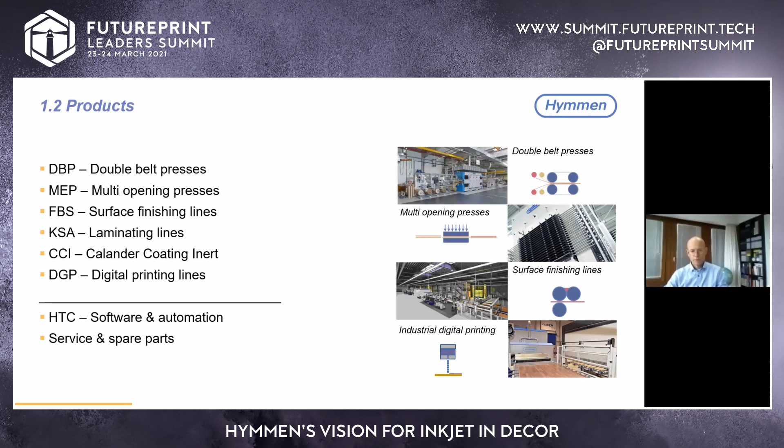Coming now to our digital printing technology, which is our focus for today. I'd like to tell you about the experience Hymmen has gained over the last 12 years. We started in 2008, presented our first machine in 2009 at Ligna, and today we estimate the yearly production on Hymmen-delivered machines at close to 100 million square meters—approximately 90 million square meters of annual digital production on our machines.

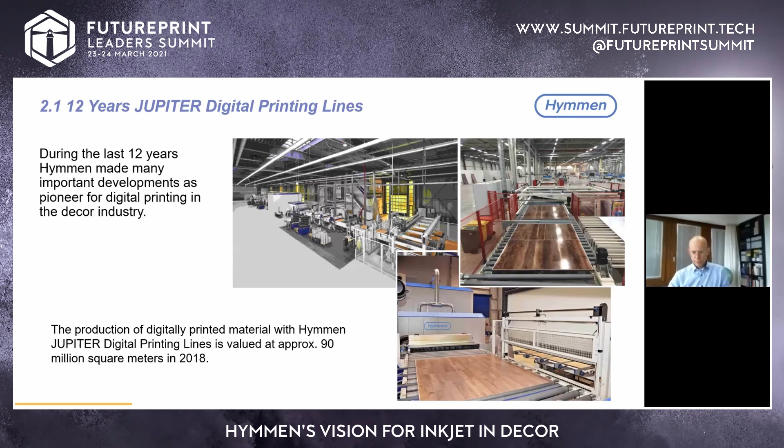You can see some pictures here of flooring lines installed at our customers. I'd like to explain a bit about the history of how we got where we are today in digital printing development. As stated, 2009 was the first presentation at the Ligna show of our Jupiter digital printing line. Our Jupiter lines use UV technology, UV-based inks, and we started with a small line on board material, then developed a line for printing roll to roll on paper.

The next step was a wider line, 1.40 meters, on doors, also UV coating, also the Jupiter version. From there we grew in width, and today the largest line, which we already developed in 2011, is a single-pass line up to 2.20 meters production width, also for boards for flooring.

We continued our development in roll to roll, also going up to a size of 1.40 meters on paper. We continued the development for edge banding material with different plastic materials—ABS, PVC, also PP for furniture boards. So basically the edge of the board can be printed digitally with the same decor as the main surface.

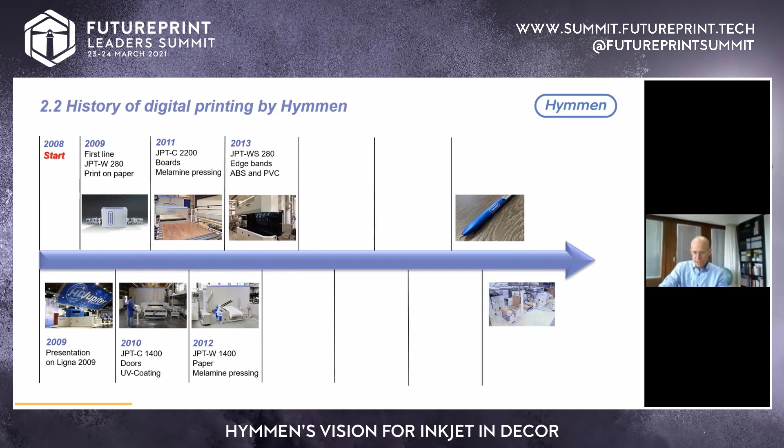Then we had a first line for modular flooring, being a plastic type flooring board, in 2014. We started with double print bars, 8 color, in 2015. We had a wider line, edge banding, double printing width, in 2016.

From there on, we continued to develop other technologies that fit together with the decor, such as our digital lacquer embossing. As the name explains, embossing a surface means making the texture, the structure that you could feel.

And we added an automatic color calibration in 2018, which is especially interesting for single pass production of very uniform colors. So if you have more stone-like tiles, this gives you especially high quality of the image adapted to the printer.

From there on, the next step that we showed and opened for the public in our demo center in Rödinghausen is 2021: the Saturn line, the first line for water-based inks, especially usable for decor paper that is processed after printing with melamine resins and pressed in presses such as double belt presses or short cycle presses, for flooring and furniture.

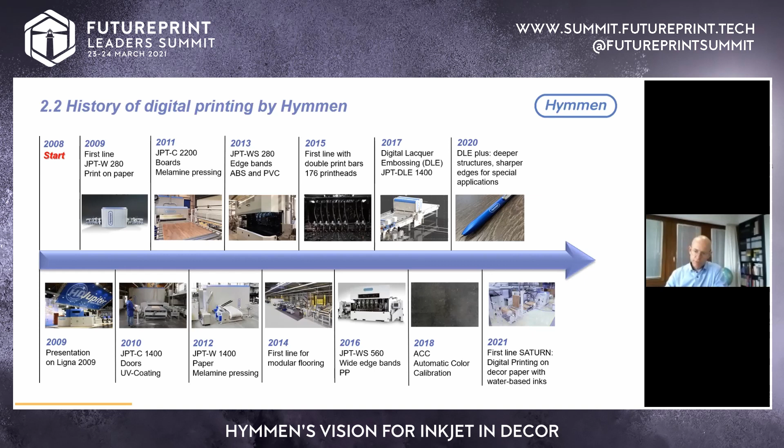So this is basically a summary of what Hymmen has done in the last 12 years in digital printing. And I would like to explain a little bit more in detail two of these developments, one being the digital lacquer embossing.

We have shortly, a few months ago, shown the second step in this development, which we call DLE+, and then go on to the Saturn.

As you see here on this slide, our inkjet technology for this digital lacquer embossing consists of a board, which is coming here from the left side, which is then applied a liquid coating, and then the inkjet embosses this still liquid lacquer with its drops, and thereafter it is hardened by UV.

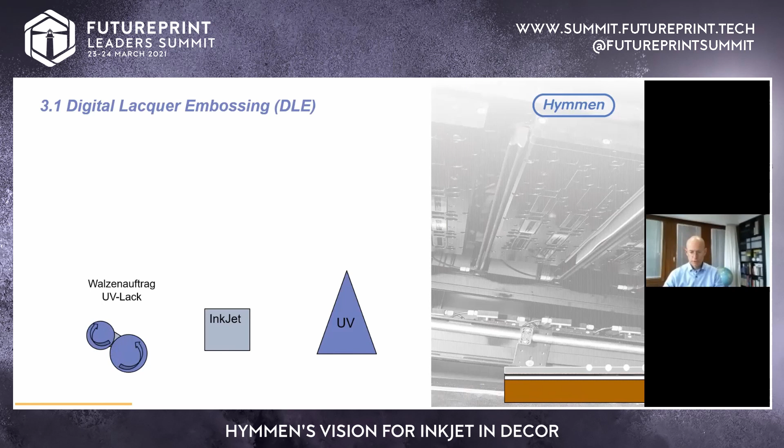I will show this animation so you can better understand what I'm talking about here. So you can see, we apply a lacquer, we emboss it with digital drops, and we harden it by the UV light. Basically, these drops that went into the still liquid layer show you the embossing image that fits to the decor that you have printed before.

The advantages of this technology are obviously the very high flexibility. Before we developed this, we had a lot of customers who talked about positive results from decor printing, but no structure that fits to that decor.

Therefore the flexibility that you want to have from digital was not fully available. You needed to—if you go into a short cycle press, for example, you have designed the decor on the board, but then you need the fitting press plate which has the right structure, or you need to change the structure if you change the decor. So it was obviously very important to be able to have a digital structure on a digital decor.

You don't need rollers or press plates. You don't have these extra costs. You have no setup time due to press plates or roller changes. As I said before, you have the same flexibility in the decor and in the structure.

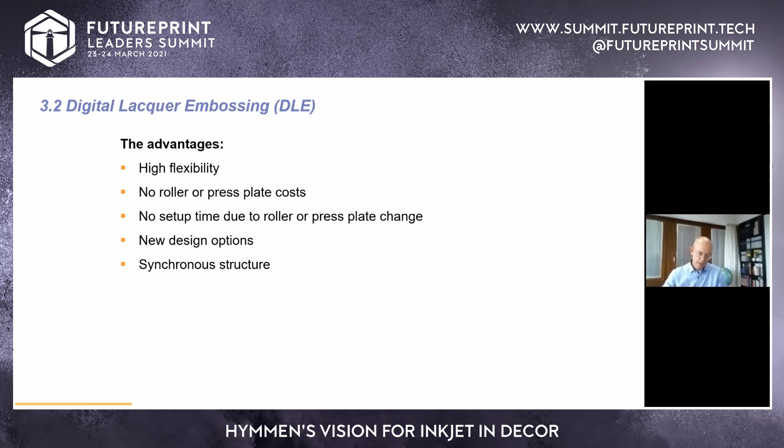Obviously, new design options are available that are not possible with press plates or rollers. You can always be synchronous, or others call this embossed in register, EIR—embossed in register structure. That is much better possible with the fitting of the design and the structure in a digital way, much less difficult and with a better result in accuracy.

You can integrate it into an existing line, or we are very happy to supply customers with new lines. Only one single print bar is needed, and we can go up to the full width of 2.20 meters. And the most important part is the last one here.

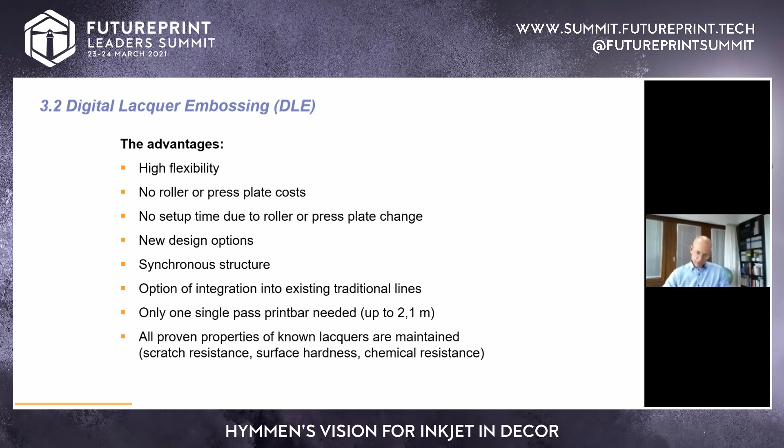You have the proven properties of your flooring. If you are selling a flooring with a certain norm concerning scratch resistance and other properties, you use the same type of finishing lacquer and just emboss this existing lacquer. You're not adding a new layer, you're using the layer that you have, and therefore you remain with your existing properties of the surface.

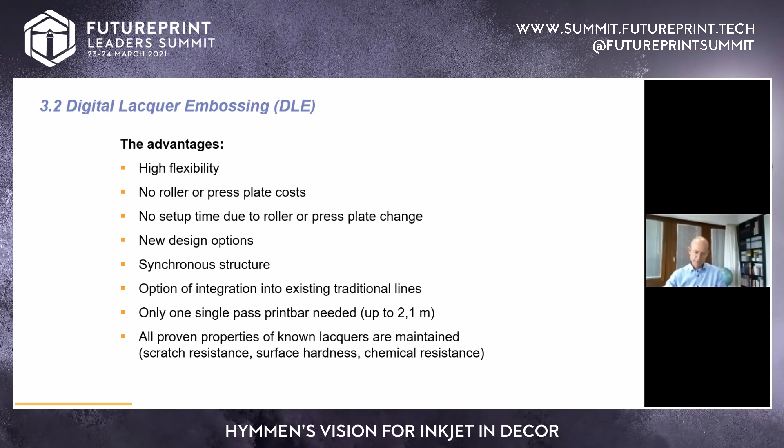So this is one glance into developments of the embossing of the surface. And the second development I would like to show you today is the Saturn digital printing line with water-based inks.

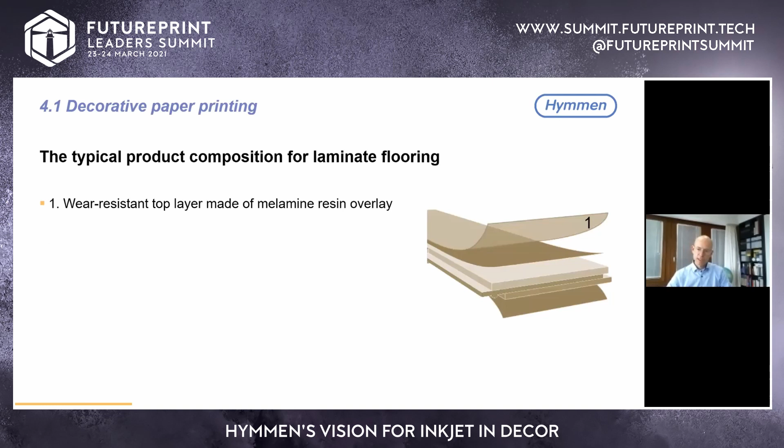Here we use a roll-to-roll machine for Decor paper, and this Decor paper is the typical top layer of a laminate flooring. You can see a typical product composition for laminate flooring. You have a wear resistance top layer that is made of a melamine resin overlay with or without corundum to have a higher abrasion resistance.

And then you have, and this is important for us, the printed Decor layer impregnated with melamine resin. So this second step here, that is the layer that is printed by the Saturn machine. You have a fiberboard MDF or HDF, and you have a reverse side backing layer.

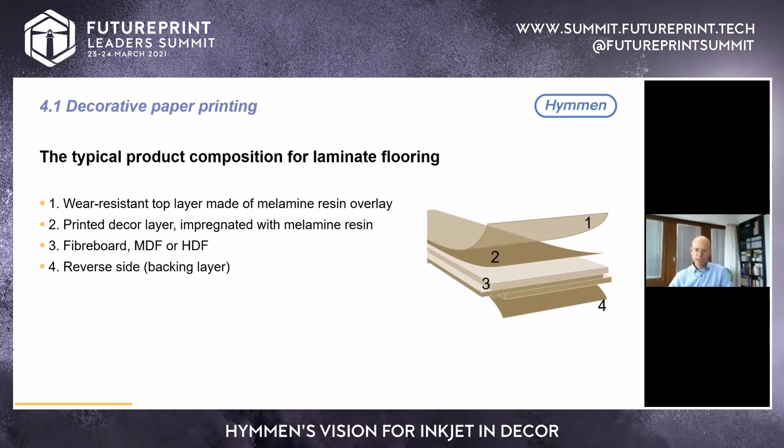Now, if you produce flooring, or if you produce furniture in a similar layup like we explained before, the typical way to do this is you have a production site. This is shown here a little bit on a European map with the little red production site signs. And you have printing locations, either your own printing location or your partner, your Decor printer who is supplying the paper to the production sites.

Obviously, you can see the logistics are at least taking some time to supply the paper from the printing site to the production site. This is typically done by truck or by train. And if you want to introduce a new design, show it to your customer, get the feedback from the customer, and then your customer orders, and then you produce in a bigger amount, it takes quite some logistics. So as you see here, the supply may be back and forth through Europe.

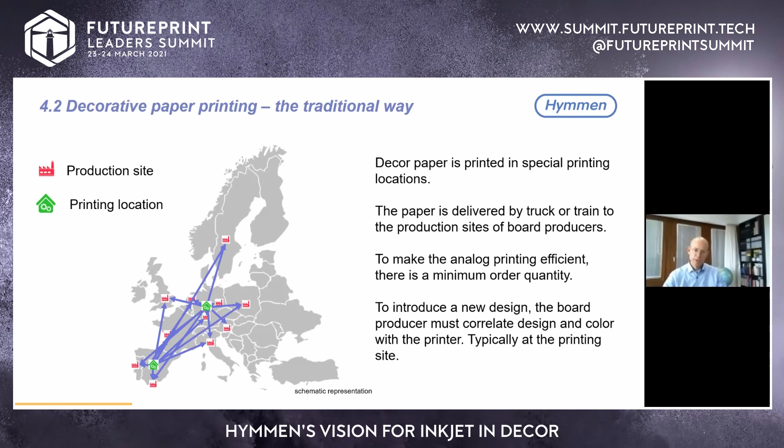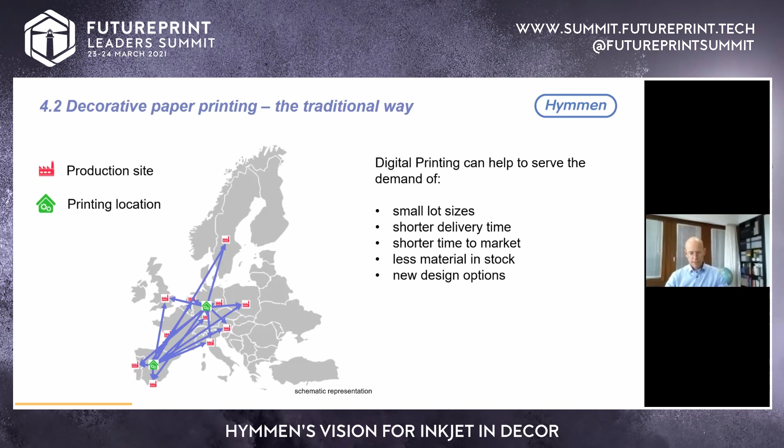Now, we want to be flexible and fast in the future with digital printing, and therefore digital printing should help to serve the demand of smaller lot sizes in the future, shorter delivery times, shorter times to market, less material in stock, new design options, etc. In order to do this, you need the paper to be printed as close as possible to the production site. And this is basically the idea that we had in mind when we started our vision for the future in Decor printing, and we started the development of the Saturn.

So how can digital Decor paper be printed? You can buy it from external suppliers, as stated before. You can operate, as seen here as an example, a multi-pass printer, which has obviously very low capacity, or you operate a single pass printer yourself, which should have the capacity that you need in your production location.

Now, does that meet your capacity needs? That is obviously the question.

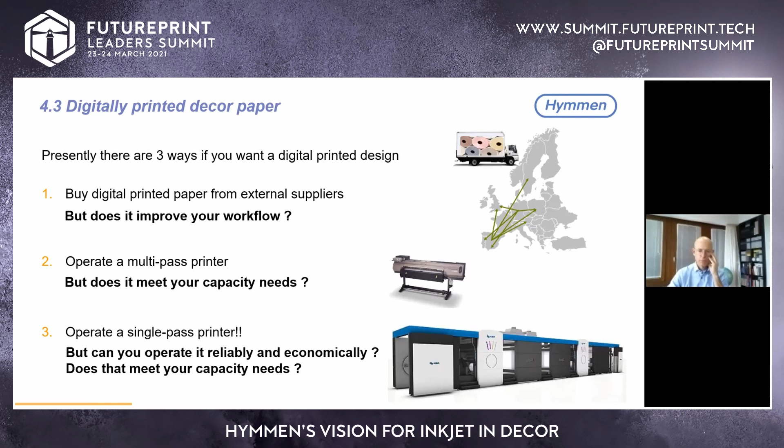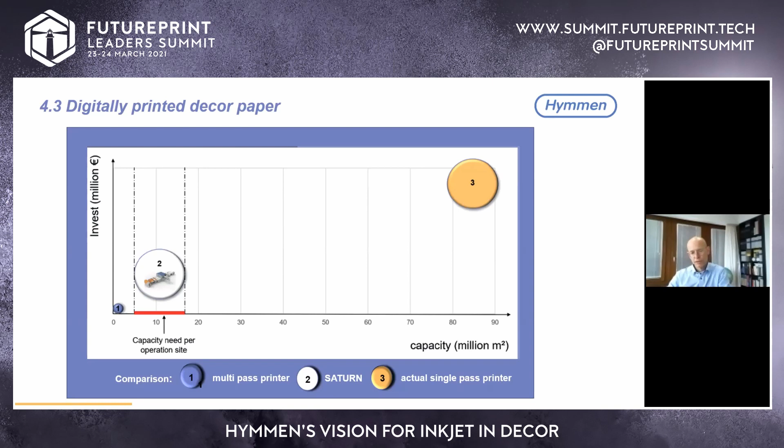Now, what we did in our strategic vision when we thought about our Saturn development, we have taken a look at those existing machines like multi-pass printers, here stated with number 1, and single pass printers number 3. And here we have shown a little bit the capacity in million square meters per year and the investment. We have taken this part here, a capacity somewhere between 5 to 15 million square meters per year as our target. And we have reached this target with the Saturn.

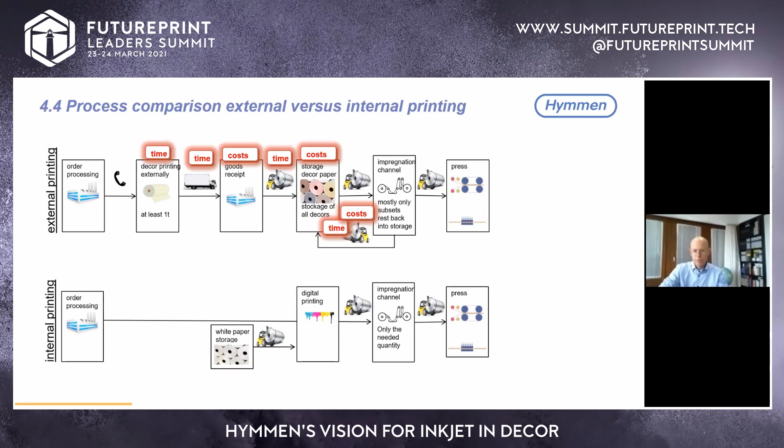Again, I will briefly flip through this. This is the process comparison, external versus internal printing, and what we want to achieve. We have all kinds of time and costs that are missing here that we don't want to have, and therefore this internal printing, or printing close to the production site also by a partner, by a Decor printer, is what we aim for.

The Saturn printing line, just as an overview, is designed for decentralized printing. We are aiming, on the one hand, for Decor printers as partners who are modifying their business model, who are thinking about being closer to their customers and being able to support their customers very close by and with high flexibility as needed in digital printing, or as is the aim of digital printing, or for producers of flooring and furniture who want to start the digital printing production themselves.

We need speeds of about 15 to 35 meters. We have a less complex process, compared to the very huge digital single-pass printers, and obviously lower capital cost. Therefore we are sure that our machine fits exactly into this part of the market that we just described.

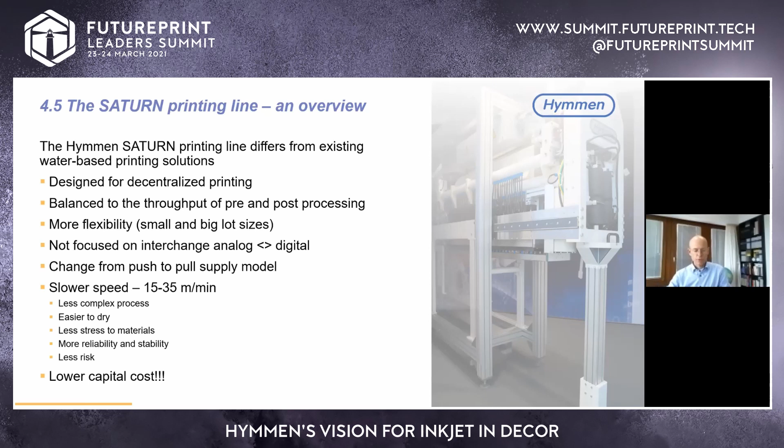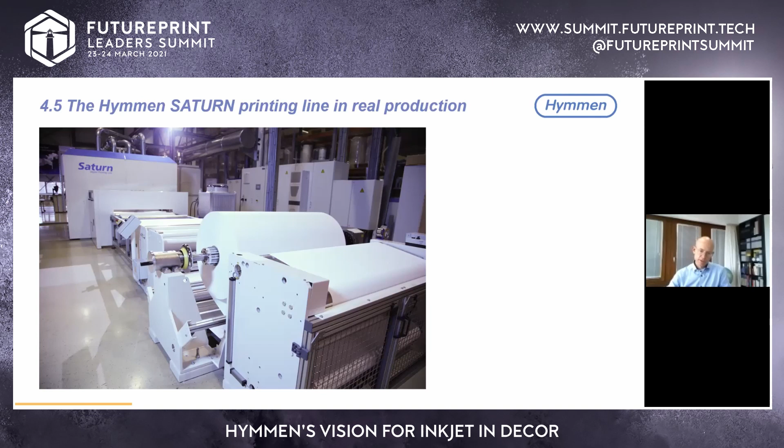Here I'll show you some pictures of the line as we have installed it. You see here digital decor paper, not printed yet, in 1.40 m width. In the background here is the Saturn line. This is the unwinding station.

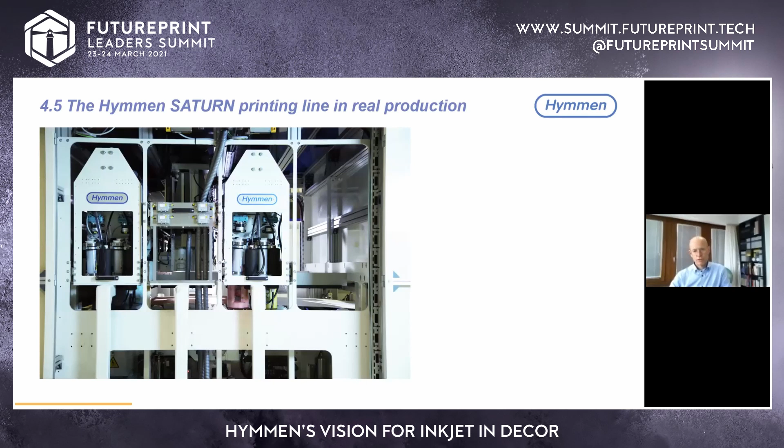We go through the Saturn and we have the rewinding station. Here you see the color bars - we have two colors in each bar. And here you have a picture from the back side of the line with, in this case, a wood decor printed and the rewinding station.

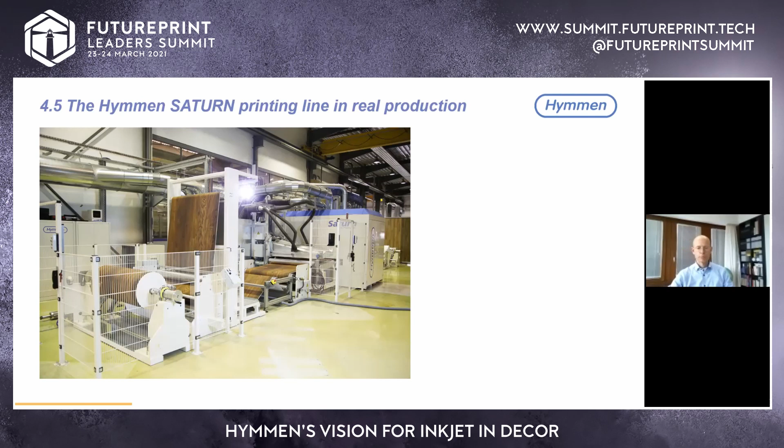So it is a small line, but being able to produce quite a good amount - as I said, 5 to 15 million square meters per year if you go into a 3-shift operation.

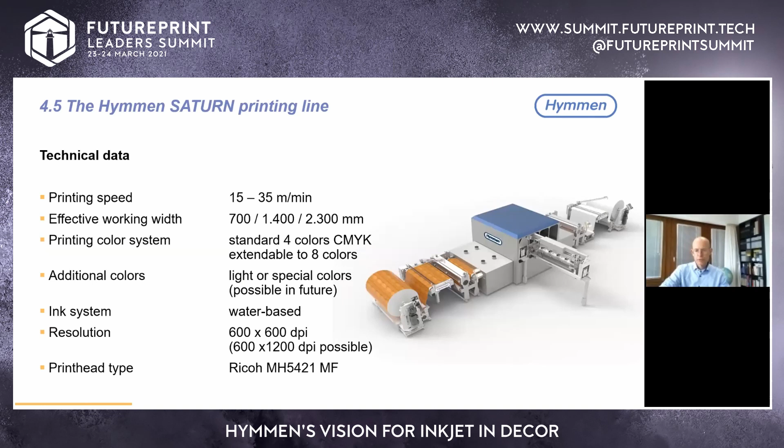Briefly, summary of most of the things I've stated before: printing speed 15 to 35 meters, working width can be 140, can be 230. You have a resolution of 600 by 600 dpi or 600 by 1200, and we have developed this Saturn line together with Ricoh.

So Ricoh has become our partner for digital decor printing. Ricoh and Hymmen provide support for that, and I think most important, if you look into the future, the vision of digital printing is shared by Ricoh and Hymmen - that digital printing will become industrial printing.

And therefore I come to my outlook, and in the outlook I have first taken a look backwards. I have taken my vision, Digital 2020, which originates from 2014, where I gave a presentation at a possible customer. It's interesting to share my thesis, my ideas from 2014 and take a look at them now, because I strongly believe that it is still valid.

So my first prediction from 2020, or in the direction of 2020, coming from 2014, was that digital printing will change the current value chain in the wood-based panel industry for flooring, for furniture. I'm absolutely convinced that right now this is exactly the case.

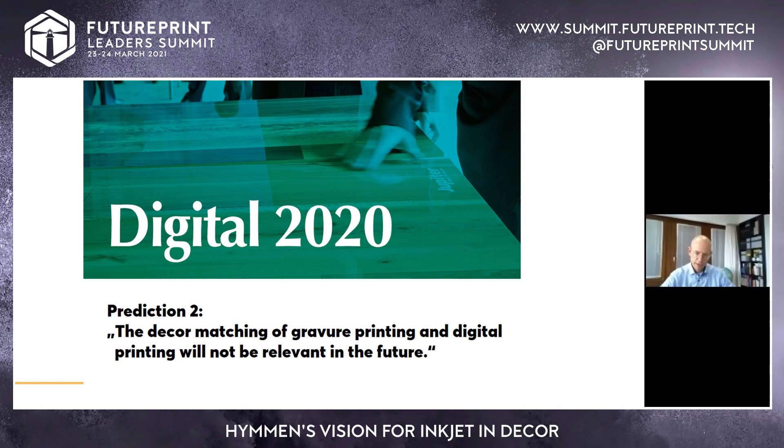The second prediction was: decor matching of gravure printing and digital printing will not be relevant in the future. And this is still my belief - it will be digital, it will be, as I say here, 100% digital. So I must underline again my idea from 2014.

The future of the wood-based panel industry is 100% digital. I'm absolutely convinced that it is only a matter of time, and we will not see any non-digital printed surfaces anymore.

So with this, I come to my last slide. Digital printing is getting more and more established in the woodworking industry. The ongoing trend to decentralization is getting stronger year by year, month by month. Our current corona pandemic has basically made this trend faster, not stopped anything - it's actually acting as a catalyst.

Not the speed needed is the most important trend, but the capacity at a certain production point, a certain production site, is crucial. Coming back to our first shown innovation - decorative surfaces need haptics, and haptics also need to be flexible, and therefore digital in the future.